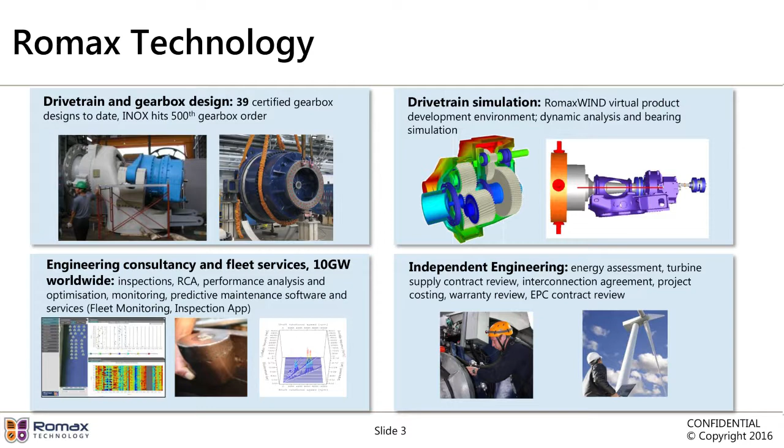The winning strategy of the wind energy sector has been the ability to reduce the LCOE, the levelized cost of energy, during the last 20 years. This cost reduction has been achieved by working on several aspects of the projects, and efforts are continuing under the current energy market pressure. The challenge has been accepted by the OEMs that have responded by introducing new design concepts to the market.

Broadly speaking, drivetrains can be split into two main categories: the evolutionary and the revolutionary design. The evolutionary is a well-established 3-point or 4-point mounted design where the main shaft is supported by one or two main bearings mounted on the bed plate. Rotor thrust and off-axis loads are taken by the main bearings. One advantage is the possibility to separately replace main bearings and the gearbox.

On the other side, in the revolutionary design, the main bearing is integrated into the gearbox. Off-axis loads are taken by the bearings inside the gearbox, either the main bearing or the planet carrier bearings. In theory, these concepts provide better reliability, however they might make replacement of main components more difficult. The integrated drivetrain modular design of 3 self-contained modules provides ease of assembly and replacement, but because of the novelty of the design, it brings higher uncertainties of future failure rates.

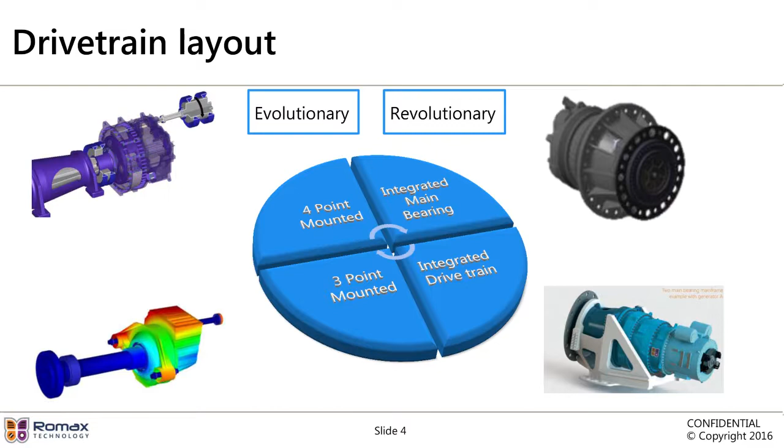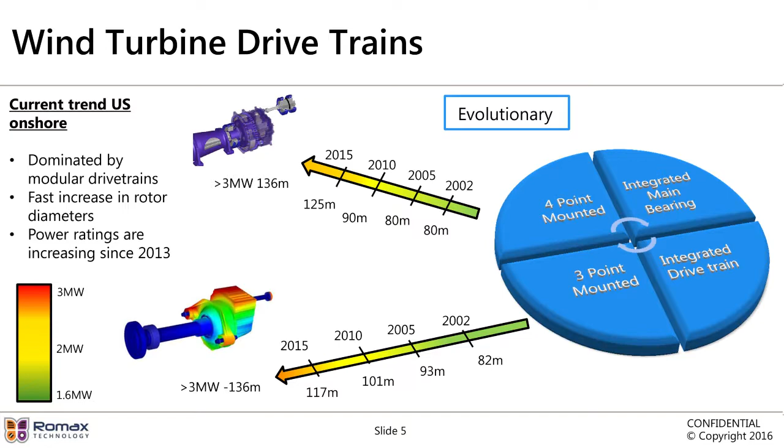As of today, modular designs are the most commonly used in the wind industry. They have been used for wind turbines for many years, but that does not mean there is no uncertainty associated with technology assessment. This slide shows how quickly rotor diameters have increased in recent years, reaching more than 100 meters nowadays, which leads to changes in operating loads, speeds, lubrication, and ultimately reliability of the design.

At the same time as rotor diameter, gearbox designs are also rapidly changing, driven by the push to increase power density in order to reduce the capex. In this slide, we split them into the 3 main categories that you can see working nowadays.

The first one for power up to 2.3 megawatt is the single planetary. Then you have the double planetary for wind turbine generators in the range between 2.5 and 6 megawatt, and then the split torque for power above 3 megawatt.

What are the features of those three different gearboxes? The single planetary with two parallel stages layout is well established with various up-tower repair and replace methods available. It has an established refurbished market. The gearbox performance under variable load is very well understood nowadays.

On the other side, the double planetary with single parallel stage layout is newer. Potentially, as we were saying before, it leads to larger O&M expenditures as planetary stages are not repairable up tower. Furthermore, fewer gearbox suppliers are available in the market for both new and refurbished gearboxes. Finally, the CMS is more challenging on planetary stages, giving rise to difficulties in data analysis and interpretation.

The split torque design is more compact but more complex. It is potentially more sensitive to manufacturing tolerances and refurbishment processes because of the increased number of components.

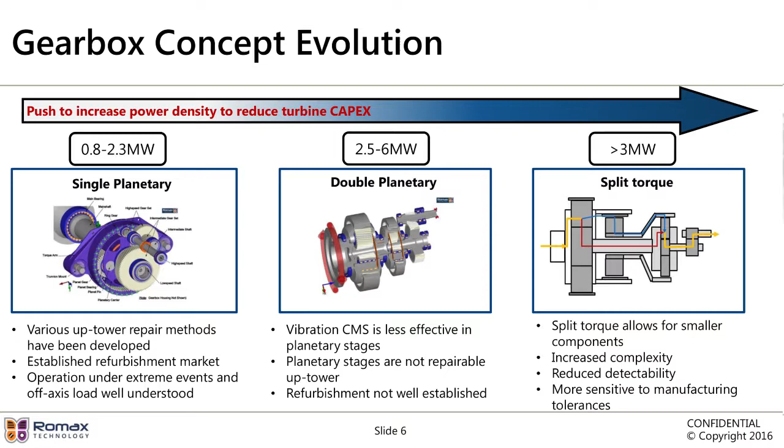So in the drivetrain technology assessment that represents the core of our expertise, it is useful to think about the following points: the drivetrain topology, how novel is the design, and how sensitive is it to the operational loads, wind shear or turbulence, for example.

Moving on to more detailed design assessment, you need to think about the status of field validation. What prototype testing has been performed, what turbines have been installed in the field, what new technologies have been used on the bearings, and are there any fundamental differences between gearbox suppliers?

For example, you need to look at the historical performance of gearboxes from different suppliers, their track record, and especially their design principles. During this phase, you need to assess how sensitive the design is to the manufacturing processes, as this might introduce additional uncertainty to the performance of gearboxes manufactured or refurbished by different suppliers.

You also need to take a lot of care understanding the supply chain of major components. Components that can only be manufactured by a single supplier can make you vulnerable in case of serial defect, manufacturing issues, or simply carry a longer lead time with it.

Finally, you need to carry out operational assessment: what components can be replaced up tower, what failure rates can be detected in advance, and by which tools.

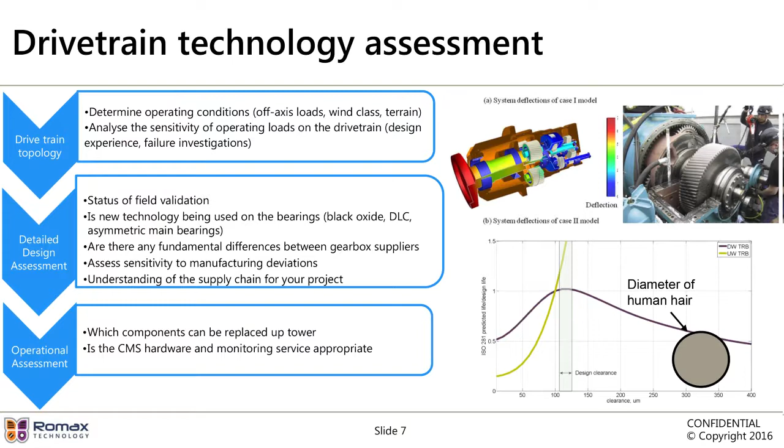Just to give you an idea, the graph in the bottom right shows how sensitive the high-speed bearing life is to installed clearance. 50% of bearing useful life is lost when the 100 micrometer clearance is not achieved. For reference, the diameter of a human hair is just 89 micrometers, shown to highlight the sensitivity of some designs to build and installation tolerances. Trying to achieve this while replacing a bearing on top of a swinging tower is very difficult, and we understand how this is a critical parameter nowadays.

The next very important step is to quantify technology risk in long-term OPEX forecast. This is of paramount importance when preparing the business plan in case of refinancing, for insurance purposes, or in general at any moment of the operational phase.

At Romax, we use our database, which contains information from approximately 10 gigawatts of projects, the failure rates of the major components, the performance, and the site operating conditions.

We then assess site operating conditions in the sense of turbulence of the site, the complexity of the terrain, and what the capacity factor of the wind farm is.

The next step is to adjust our historical failure rates to the site-specific operating condition. This is typically done with all major components - gearboxes, blades, main bearing - plus additional technology-specific components should be included. We are currently seeing increasing failure rates for the pitch bearing. Also, in our experience, failure rates for the main bearings tend to be underestimated.

The final step is to review the maintenance. What are the regional costs for major components? What is the availability of capital equipment? What is the maintenance strategy? Is, for example, a CMS installed on the site?

Then the experience of the site team with dealing with major maintenance operations. For sure, you need to take care about logistics of part supply, how many parts are available on site, and the way they have been stored, because storage can also have an impact on the quality of the material.

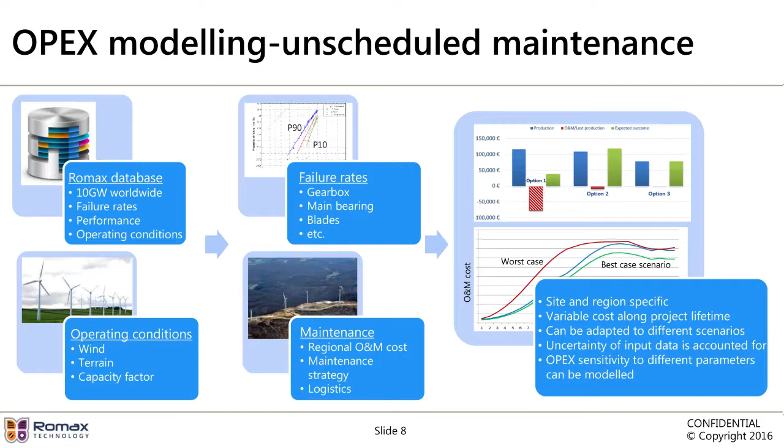Access to good quality data is of paramount importance. You need to consider several aspects in this phase. Even if you are the proud owner of the squiggly line, there are a few more things that you need to consider before you begin to use it for your forecast.

First, the major component supplier. The same turbine can use different gearboxes from different suppliers with very different failure rates. Make sure that this information is supplied for each of your turbines.

The design upgrades - do they address the failure mode? Often, the main bearing is replaced by a larger bearing, which in some cases can worsen the performance rather than improving it. Refurbished components - this is a very important point nowadays.

At the moment, everyone assumes that the quality of the replacement part is going to be the same as the original. In our experience, this is not often the case. So it is very important to establish good processes with your suppliers of refurbished components. At the very least, you need to ask the following information.

What is the original failure mode? The operating hours of the original components, what component have been replaced or remanufactured, and please insist on good traceability and quality control. We have already mentioned the importance of operational condition.

It is very easy to over or underestimate the failure rate when using data from very different sites. And last but not least, maintenance quality.

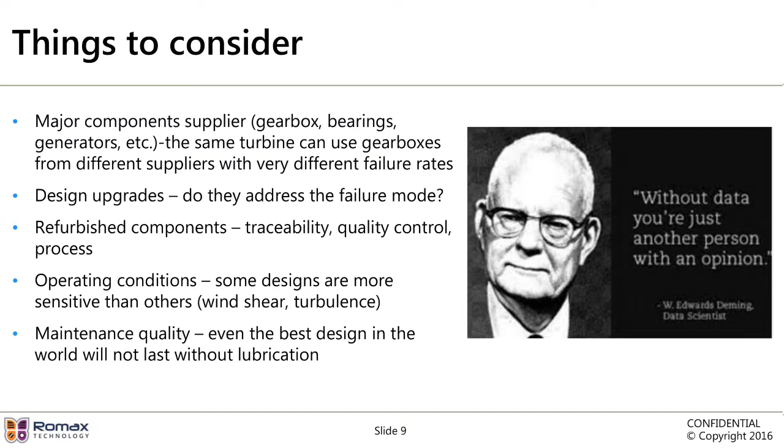Even the best design in the world would not last without lubrication, and we have seen a lot of turbines where all of the auto greasers were disconnected because they were causing too many alarms, resulting in main, pitch, and yaw bearings running without any lubrication.

So this is the case when you have a lot of data, but what if there are no failure data because the design is new? At Romax, we use our RomaxWind to produce a model that can be tuned to historical performance data and then used to assess the new design.

In the picture, you can see an example of our main bearing. We have created a relatively simple model of the main shaft, tuned it to match contact pattern observed in the field, and you can see that the upwind race of the bearing, that's the picture in the bottom left, does not take any load as observed in the field. There are still machining marks evident on the picture below, while the downwind race takes all the load.

The distribution parameters fitted to the historical failures are also matched, as you can see in the graph at the bottom. Once this is done, this model can be used to analyze return on investment for possible improvements, changes to lubrication, maintenance, or even new designs.

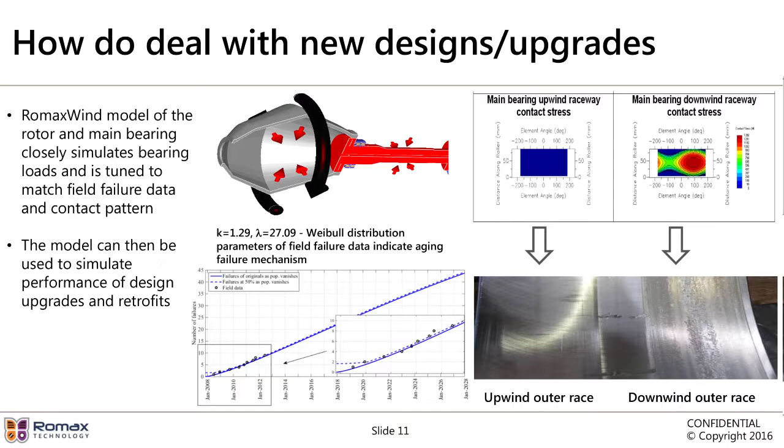Now, beyond 20-year life, a new problem that the wind sector is already experiencing, and that will be even more relevant in the near future, is the one related to lifetime extension. Can the turbine be kept operational and productive beyond the predicted 20-year life?

Our approach, based on both data and simulation, is very useful when looking at the feasibility and cost forecast for life extension scenarios. Currently, only qualitative assessment is expected from an independent engineering firm when asked about possibility of life extension. And while addressing many useful points, such assessment introduces high uncertainties and is unlikely to be accepted by financial institutions. At Romax, we follow a different approach.

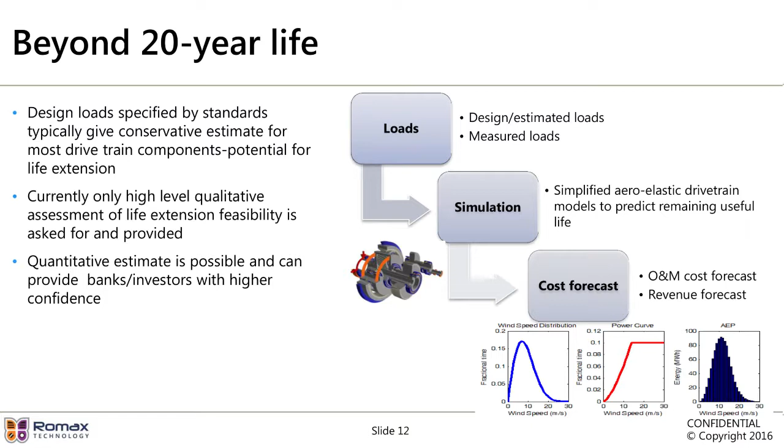First of all, the difference between design loads, which are typically more conservative, and actual site loads can be established by analyzing site wind data. Then, a simplified aeroelastic turbine model can be run to quantify operating loads experienced by the turbine during its operation and estimate remaining useful life of the major components. After that, combined with the O&M model, different scenarios can be analyzed, providing greater confidence in future cost and performance.

And I will leave you now the word for any questions or clarification.